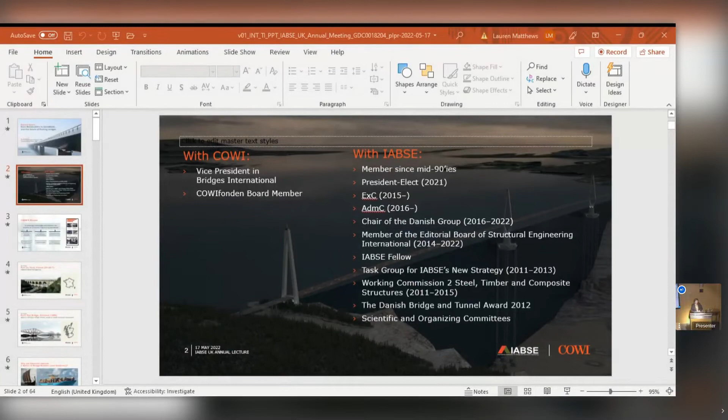Until last week, I was also chair of the Danish group. I have stepped down now because with my new position as incoming president, there is a slight conflict of interest, and definitely with Ian overseeing the activities in the national groups, I don't dare to be the chair anymore. So that was a bit about my activities with the IABSE, and as Ian said in his introduction, it is really very interesting and very valuable.

What I like about it is that it embraces all aspects of structural engineering, all types of structures and materials, and all phases of the life of a structure, from initial ideas until rehabilitation and eventually demolition. It deals with historical structures as well. So there's really something for everybody and for every taste. We're close to 3,000 members in over 100 countries, and we'll soon be celebrating our 100 years anniversary. So I think there's a lot to celebrate in the association.

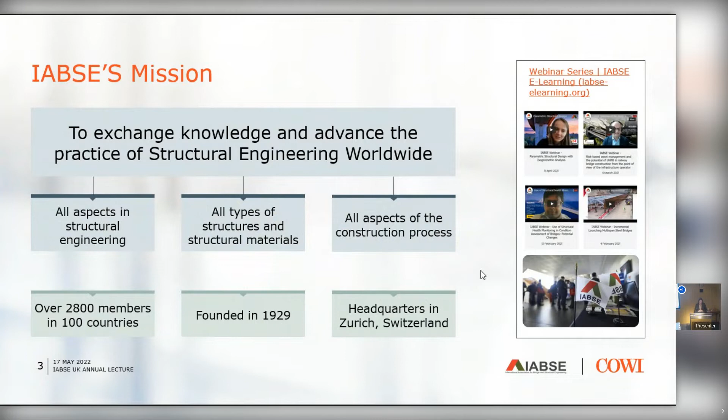So why are structures so important? And as Ian quite rightly said, tonight we're probably mainly focusing on the B, on the bridges, but the S and E, structural engineering, is equally important in the association. So it just happened to be bridges tonight. And I have picked a few examples of historical bridges or structures that I think illustrate why structures have this potential to become so iconic.

And Pont du Gard is, for me, a good example. It was built more than 2,000 years ago as an aqueduct, and it served as an aqueduct transporting water for 500 years. And then it fell into disrepair, and it wasn't really used until 270 years ago, when it was upgraded with a road. As you can see behind the lower level of arches, there is actually a road now passing across the river. So I think that's a good illustration of how old structures can be put into new use and become a very meaningful part of current infrastructure.

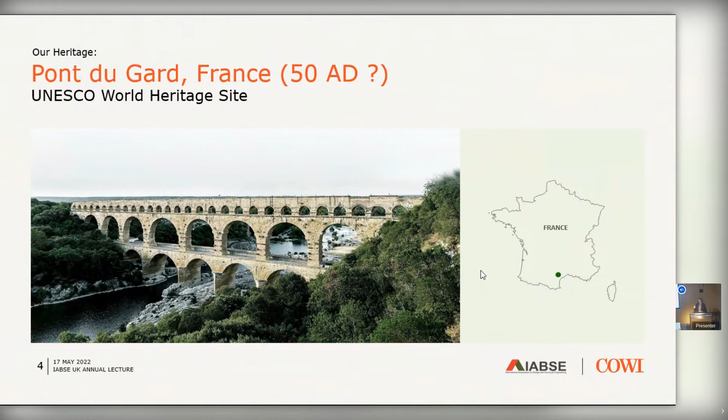Another one I like is the Forth Rail Bridge in Scotland, which, as the name says, is carrying a railway. It's a cantilever truss, and it was the longest span. It was the world record for over 25 years. I think that is amazing. I mean, today the world records are suspension bridges, but back then it was actually a structure like this that was able to hold the world record for such a long period of time.

It is a massive structure, but I think it's beautiful in its own way, because the form illustrates the function, and you can also read how it was built out of this structure. So I think it is a wonderful example of a structure where somebody put a lot of effort and all their skills into it, and it's still in operation, over 130 years. So I think these are really great examples for inspiration.

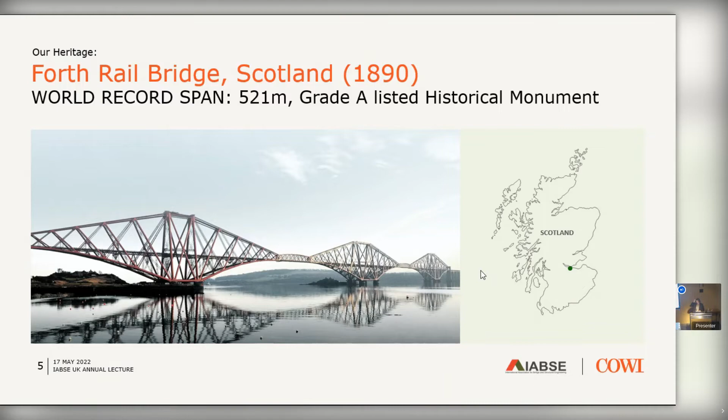So now none of these bridges had any Danish input, or at least very little. So how did Denmark become a nation of bridge builders? And to tell you the truth, I actually think it started with us being seafarers. And I couldn't resist the temptation, being in London tonight, to throw in a picture of a Viking ship, or at least a replica of one. And perhaps I should apologize for the mess that we caused in the process.

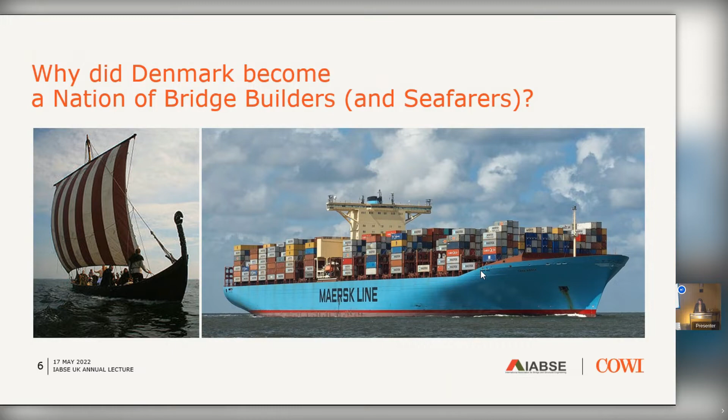We're still sailing the seven seas. This is one of the biggest container ships at the moment. It's owned by Maersk Line, which is a Danish shipping company. So somehow it is linked. And it is, of course, because our country consists of over 440 islands. And there has always been a need to cross the sea or cross obstacles somehow. So I think it's fair to say we started as seafarers, but we became bridge builders.

I would also note that it's a very flat country. The highest natural point in our country is 170 meters above the sea. So we are very concerned with rising sea levels and the effects of climate change. So that is something that feels very real for a country with that topology.

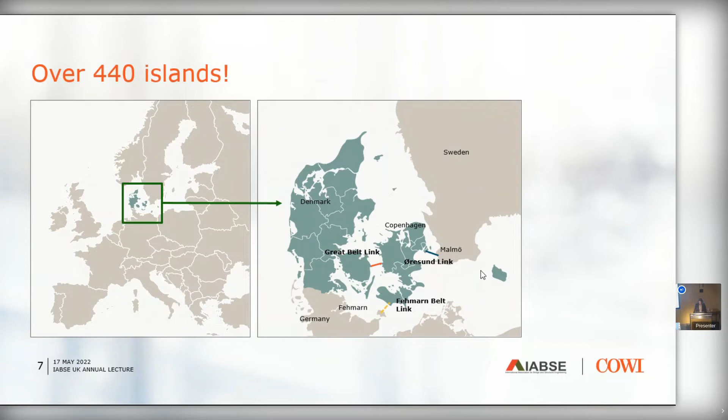We do celebrate our heritage, and here is a selection of the current Danish banknotes. So on one side, it has artifacts from the Stone Age and the Bronze Age and the Iron Age. And on the other side, it has important Danish bridges. And you will see on the biggest bill, we also have the biggest bridge, that is the Great Belt Bridge. So I think it's interesting to see actually that the entire collection of banknotes has a bridge on them. So it just illustrates how important it is for us.

So that takes me to the Great Belt link, and I understand there are actually people in the audience who have worked on it. So if you have some comments, then please add your story. This was the first project I worked on when I joined COWI in the mid-90s. It was just the last phase of Great Belt, and during construction, after the main span had been closed, it was observed that it suffered from vortex shedding, and we had hoped that when the asphalt was put on, it would dampen it, but it didn't. So I was part of the team that had to, in all haste, retrofit it with guide vanes, these little devices underneath the deck that suppress the vortex shedding.

And according to our aerodynamic specialist, it is now as stable as an eye surgeon's hand. So it did work, but it was quite an interesting piece of research we put into it, because there was an expectation that it would suffer from vortex shedding. But again, why fit something that's not needed? It's a waste of material and it needs maintenance. So I think there were some sensible decisions behind waiting.

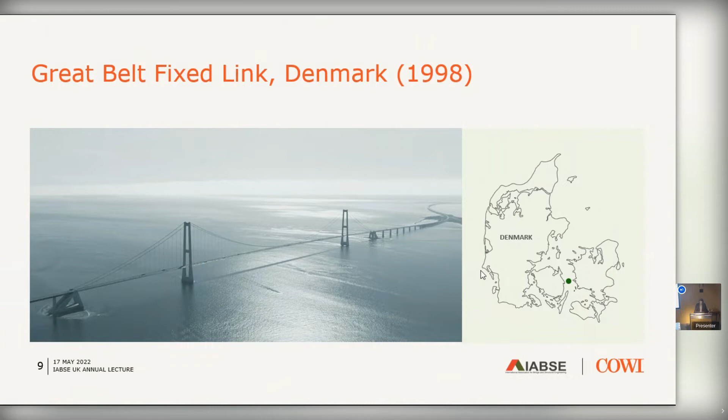Yeah, if you're interested in cycling, then I would encourage you to keep an eye out for this year's Tour de France, because the Grand Départ will be from Copenhagen. And the second stage will pass over the Great Belt Bridge. We'll close it. It's one of the most important pieces of infrastructure in our country, but we will close it for the Tour de France. So on the 2nd of July, the peloton will pass on the bridge. And if we have weather like today, it will just be an amazing day.

Another early career project that made a huge impression on me was the Lions Gate rehabilitation project in Vancouver. I was so fortunate to be seconded to Buckland and Taylor when they joined the COWI group, and they were working on this amazing project. So a complete deck replacement of a suspension bridge, which by then was 60 years old. And it was so carefully planned that they could cut out sections during the night, fit the new section, which has a slightly different cross section, and then it would be open to traffic the following morning. Really, it was just like clockwork.

And I think with our aging infrastructure, we'll see a lot more projects like that. There is a need to upgrade our existing infrastructure and to get the most out of it. Upgrade it to new use, to increased loadings, or whatever is needed. But I think this is a great example of how it can be done.

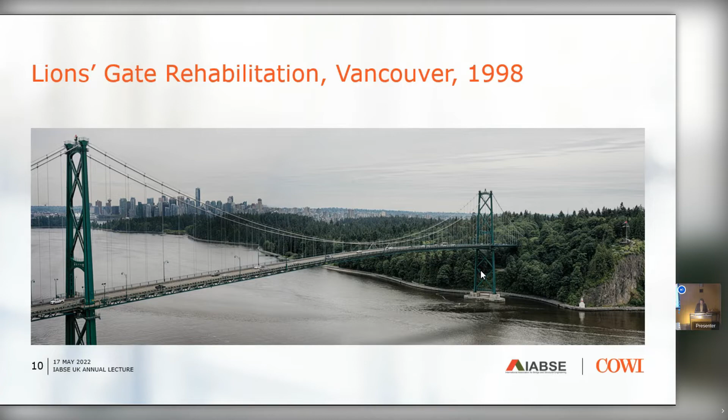And then, as Ian said, let's move to Stonecutters. I think this is a favorite that we have in common. For me personally, if I was to mention only one project, this would be the bridge I would highlight. I worked on the project for 10 years, so it has made a huge impact on my professional career. It started during the design competition, and I'll come back to who won that design competition. You probably have guessed by now. But I was on the other side, part of the team assessing the entries in the design competition. So it was really interesting comparing the different schemes and seeing the imagination that the teams put forward in that design competition. I think there were 25 entries.

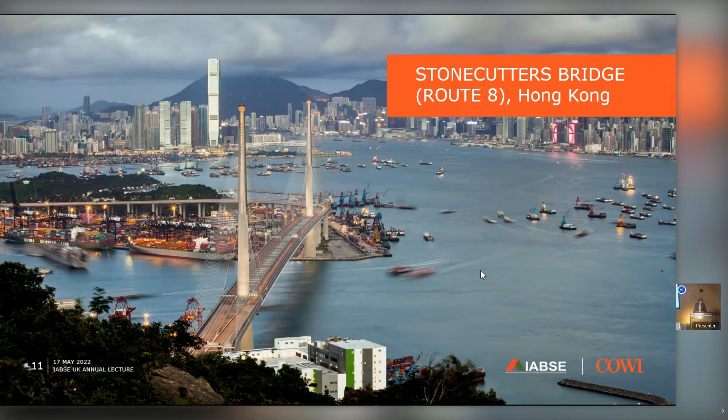And then I moved on to be involved in the detailed design and finished with 3 years on the construction side. And needless to say, the lessons learned and the feedback you get as a young engineer working on a construction site, you just can't pay for it with money. It is so valuable. And I would encourage everybody to have that experience. So the parties involved.

And we should probably start from the bottom, because the winner of the design team was a group with Halcrow, Flint and Neill Partnership, as they were called back then, SMEDI from Shanghai, and then Dissing and Weitling Architects came up with a stunning design. And what is built today is very loyal to that design.

I would also say here's a small link back to the Danish seafarers, because I got this picture from a captain from the Maersk shipping company the first time he passed under the bridge after it opened to traffic. So that was quite nice to see what it looks like from that angle.

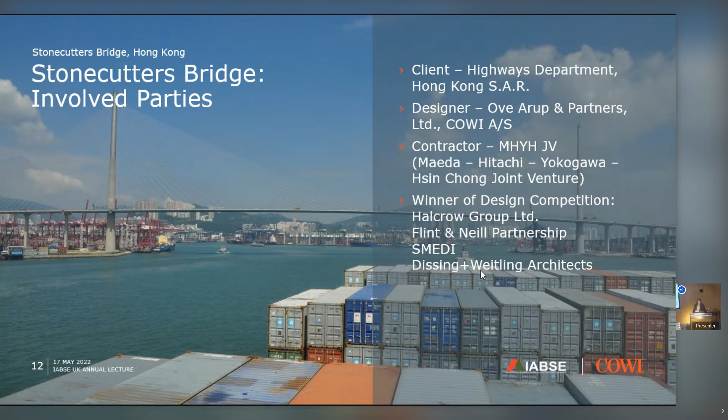What is special about Stonecutters? I think one thing to highlight is the prominent location. You can see it's right at downtown Hong Kong, so it's clearly visible from many areas on Hong Kong Island and the Victoria Harbour area. It's prone to typhoons. Basically, it will get a direct hit, and it has been tested full scale by direct hits of typhoons. There's nothing to give just a little bit of slack on the wind loads.

It is spanning across the entrance to one of the busiest container ports in the world. So closing it during construction or during lifting of deck segments was not really an option. So that was also part of, I think, the decisions that the design team made, or the ones who came up with the concept that a cable stayed bridge would be a really good solution for this location. And in order to span the entire entrance to the container port, it required what was at that time a record span.

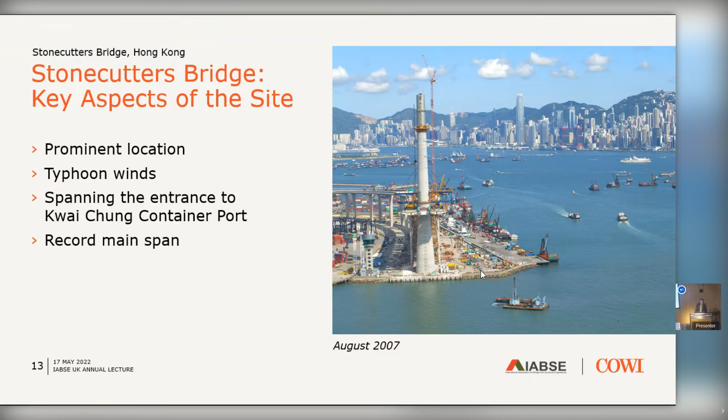So Hong Kong is prone to typhoons, as we heard a couple of times. What you see here is a track of Typhoon York. And the containers that have fallen down there, it's not even the result of Typhoon York. That was just a small typhoon that happened while I was there. And driving home one day, we saw, oops, there was some effects of that typhoon.

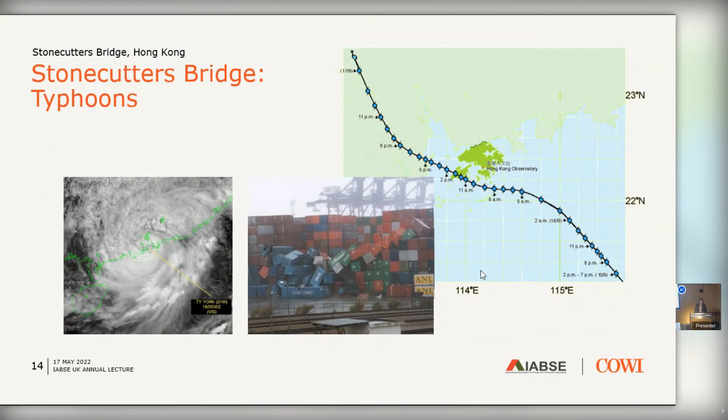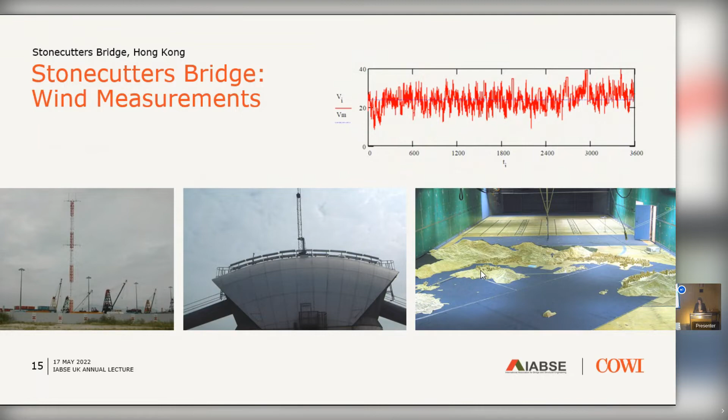And one of the key aspects that came out of it was a combination of the characteristics of the wind, because it was very turbulent at that place. There are some quite high hills, definitely higher than what we have in Denmark, 500-meter high hills nearby. And it was extremely turbulent, and the vertical component of the turbulence played a decisive factor actually in the wind loadings on the deck. And that was of course a combination of the layout of the deck and the characteristics of the wind. And we're kind of taking that learning with us in other designs of twin decks, as we'll see a little later.

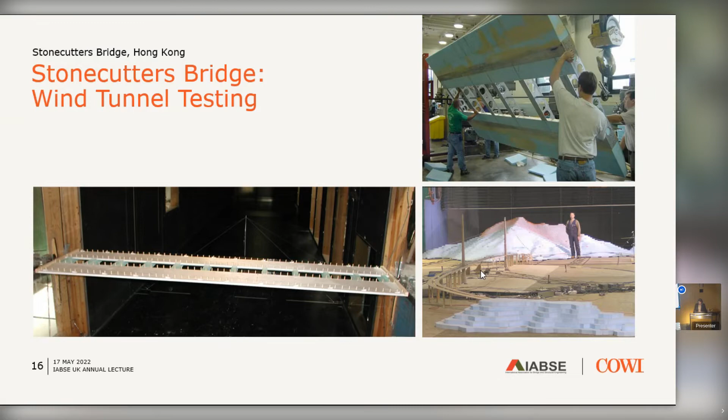So then I came back from Stonecutters in 2008, and it was a little bit of a difficult transition working on a site and then getting back into the office. I have to say it is so enjoyable to be able to go out there and look at the things and discuss with the contractor and find solutions together.

But I moved back in 2008, and then I mainly focused on project management. I haven't listed the projects here, but I worked with a couple of you in the audience on some of them. Tender designs, detail designs, checks, and the first concepts for floating bridges started at that point in time. And then I moved into line management as well.

During the same period of time, I became very active with IABSE, mainly in the first instance thanks to COWI's CEO at that point in time, Klaus Ostenfeld, himself being a former president of IABSE and being very focused on technical excellence. I think that's very much the DNA that runs through the company, and through Flint and Neill Partnership who joined us, and Buckland and Taylor who joined us. It's very much driven by that wish to push the innovations and the boundaries of technology.

So Klaus introduced me to IABSE, and quite quickly in 2011, this group of people were entrusted with the responsibility of coming up with a new strategy for IABSE, which was at that point in time losing membership. As you can see there, with Klaus being at the back, being a former president, at that time the current president was Pete Popovich standing in the front. And then there are four coming presidents in the picture.

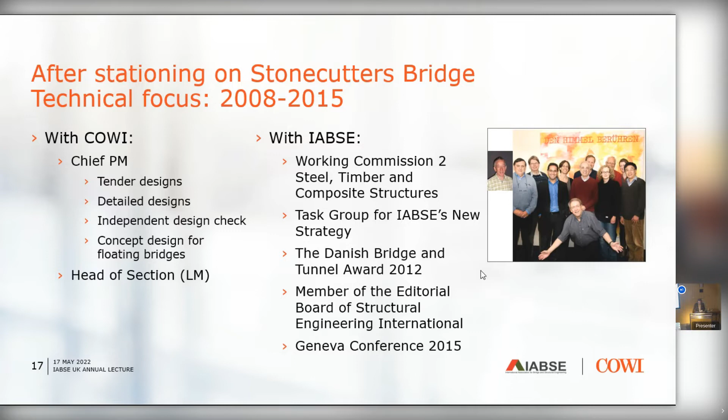Then the next steps for me, I became vice president with COWI in 2015 and a member of the foundation. COWI is owned by a foundation and by the employees. The foundation supports research. We have quite large donations every year to various types of research, not only within the company, it's also completely independent from the company. So that is a very good way to supplement what I do in my daily work.

And then with IABSE, I've been with the executive committee since 2016, and then president-elect from October last year. I look forward to collaborating with Yaojun Ge on this transition period and making sure that all the good initiatives that have been started are also implemented and carried through. So it's a great honor.

How are we looking for time, Ian? Are we okay?

Good, then let's move on to some of these record spans, because during this period of time, we could see a global trend that the crossings that were put forward and proposed were becoming more and more challenging. Deeper waters to cross, longer crossings, and if they're deep and long, they typically require longer spans. In very harsh environments, and consider, as I said before, the effects of climate change are also impacting our structures. The extreme weather is becoming more and more extreme.

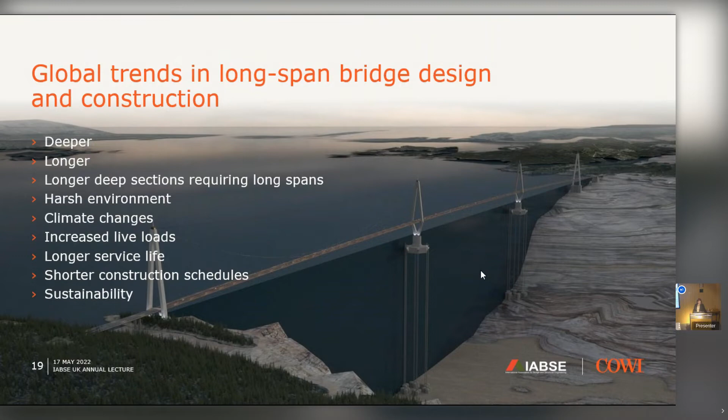So in order to do that, we need to come up with new technology, and we need to apply technology that may already be known in other industries, but we need to bring it into structural engineering. We need to think sustainability, the benefits of digitalization, so we work really efficiently. And we need to design for the future. So it's about imagining what could be the future requirements for this infrastructure. How can we make sure that it is future-proof?

And in order to do that, it's really important that all the stakeholders collaborate. We need to pull in the same direction in order to be successful. And this is teamwork. I mean, this is not something that one single person can claim to do. So even though we all have a favorite bridge, I don't think any of us can say this is my bridge. Those days are over. It's really teamwork.

So let's move on to Çanakkale. So first of all, the location. Perhaps you can see the circle blinking down there. The blue dot in the middle, that's the Sea of Marmara, and up towards the upper right, you have the Bosporus Strait with the 3 Bosporus bridges. One of them, the most recent one, is shown there, Bosporus 3. To the right, to the east, you have the Osman Gazi Bridge, the Izmit Bay crossing.

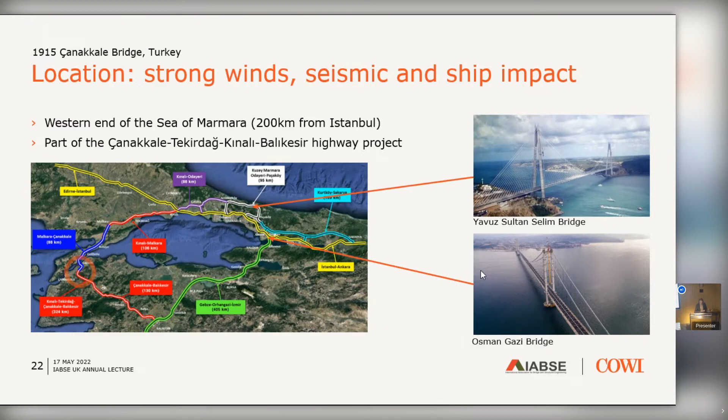So this slide is very busy, but it is really to illustrate to you that it's the red part that is the important thing. The little green bridge there is just a component. So even though it can be very, very meaningful and challenging for bridge engineers like us to design a world record span, it's not a goal in its own right. It is because it's part of something bigger. So in this case, it's part of an 85 kilometer highway that basically closes the loop and saves a lot of traveling time around the Sea of Marmara.

So what is characteristic of this site? When you look at the location of it, on one side you have Europe, on the other side Asia. So there's a fault line in the middle of the strait. The seismic activity is not quite as big as on the Osman Gazi Bridge, but it is quite high seismic loading. And the location near the east end of the Mediterranean Sea means that there are high wind loads.

As you would imagine, there's significant shipping traffic through that strait because it's the only route from the Mediterranean through the Dardanelles, Sea of Marmara, Bosporus, and then to the Black Sea. So there's a lot of shipping traffic, both container ships and cruise ships.

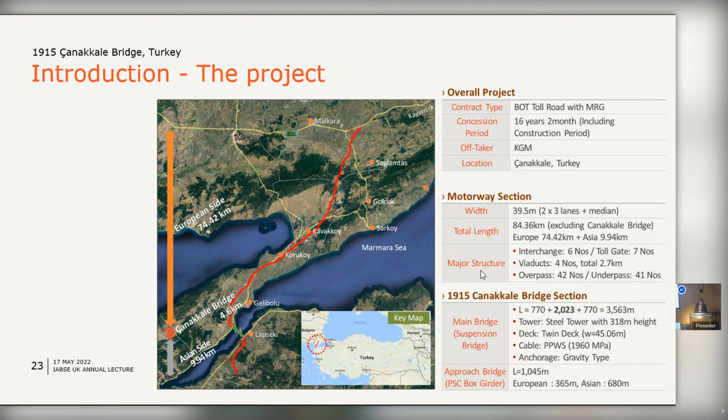There's a lot of symbolism in the design of Çanakkale, and that was there when COWI got involved in the detailed design. So there were some very strict requirements to the design. It is a historical site for the Turkish people, and it reflects on an important battle in World War I in 1915. And it took place on the 18th of March, therefore the pylons are 318 meters tall. The groundbreaking ceremony was on the 18th of March, and the opening to traffic was on the 18th of March. So the symbolism is important.

And then the famous main span, 2023, that's quite an odd number, but it is because the Turkish Republic celebrates its 100 years anniversary in 2023. And originally it was intended that the bridge wouldn't open until next year, but construction was so fast and it was accelerated, so it actually opened a month ago. So in case you wonder what is in it, then that's the explanation.

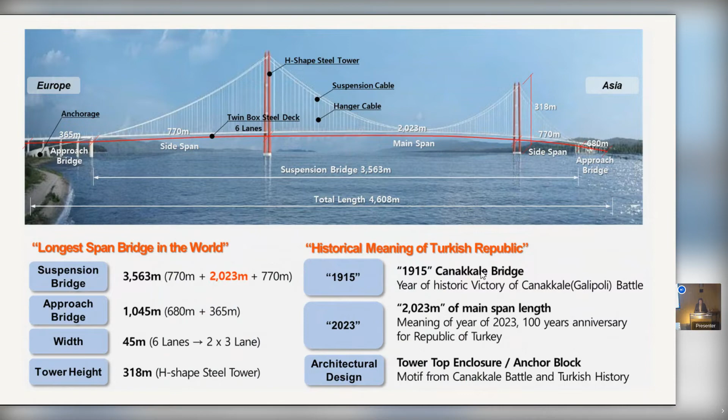Here are the stakeholders, and it is a very international project. The owner is the Turkish Ministry of Transport. And then there is a concessionaire and the contractor, consisting of 2 Turkish contractors and 2 Korean contractors: Daelim, Limak, SK, and Yapi Merkezi. So that was

the contractor joint venture. And then COWI was responsible for detailed design together with Korean subconsultant PEC. And they had developed the tender design, so we didn't get involved until it was actually won. Arup, together with Aas Jacobsen from Norway, were responsible for the independent design checking. And then just to illustrate how complex it is, financing comes from 24 different banks from 10 different countries. So it is a very international project indeed.

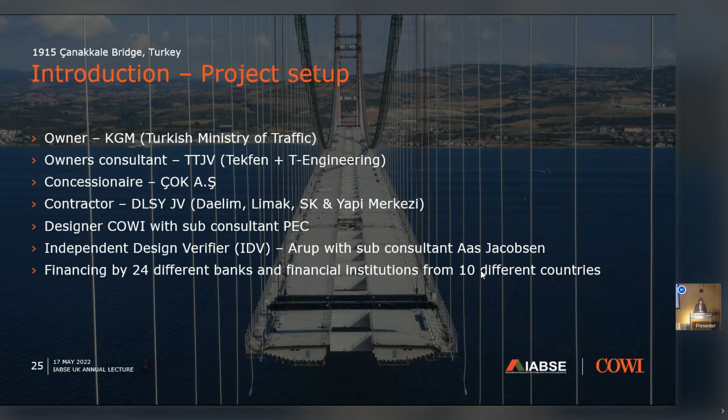The technical challenges include the ground conditions, not super favorable for such a big bridge, and we had to make some modifications. The seismic activity, as I already mentioned, live loads. If you have such a long loaded length, then the live load becomes very significant. Wind climate dominated large portions of the design of the superstructure. And of course, such a big bridge, just absorbing the movement was a challenge. So there were several hydraulic devices installed on the bridge in order to control the movements. And then both the design schedule and the construction schedule were very aggressive.

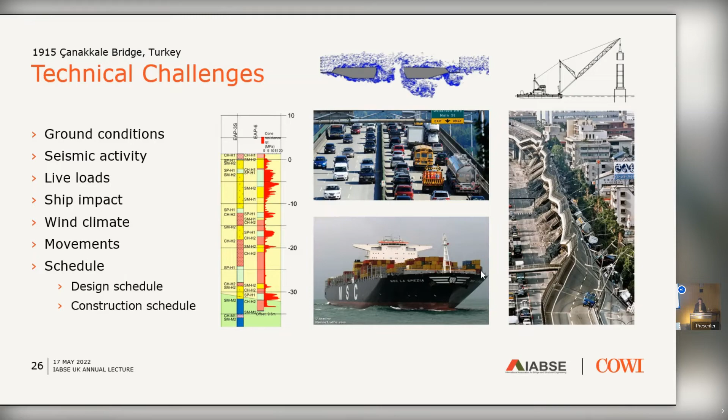So in order to meet such an optimistic design schedule, I'll show you what it is in a second, we had to really optimize digital solutions and work efficiently with the data and not transfer data manually from one tool to another tool. So in the company, we have our integrated bridge design and analysis system where basically everything takes place inside one big global model. It has everything, including the construction sequences.

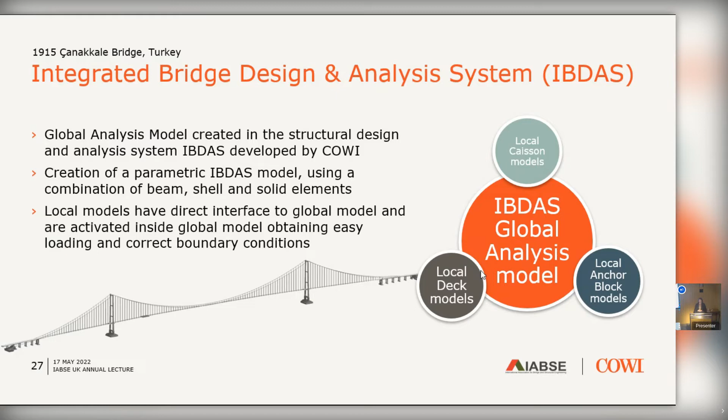So the way we manage it, instead of having a big heavy model to work with, we have these building blocks. So we have shell models of the detail that we're currently interested in, and then we can switch them on and off depending on whether we are looking at the substructures or the superstructure. So in that way, we could optimize the analysis. And also, we included the fatigue model in the global model.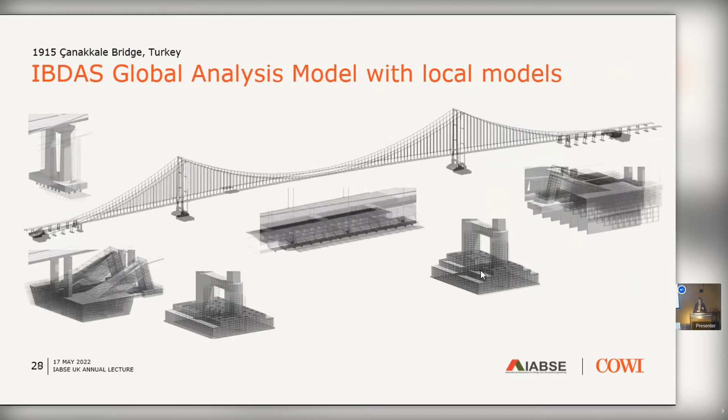And that was actually based on a learning we took away from the Messina Strait Bridge, which I haven't talked a lot about yet, but I'll come back to it. That's actually a triple box arrangement because it carries both rail and road. And during the design of the Messina Bridge, maybe 15 years ago, it was noticed that it was very important to have the global effects included in the fatigue stresses, in the stress ranges. And we wanted to do that because we didn't want to be overly conservative. You can combine worst with worst, but then you're over designing.

And as you all know, the bridge deck is carried by the hangers, the cables, the main cables, and the tower will ultimately take the compression force. So any additional weight in the deck will just have a knock-on effect on all the other structural components. So therefore, a lot of effort was put into really optimizing the bridge deck.

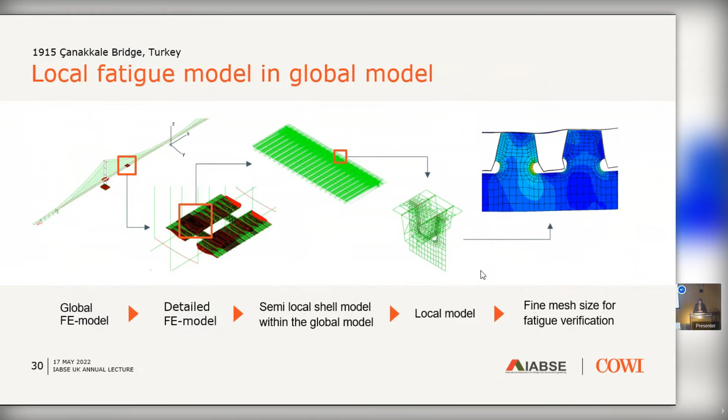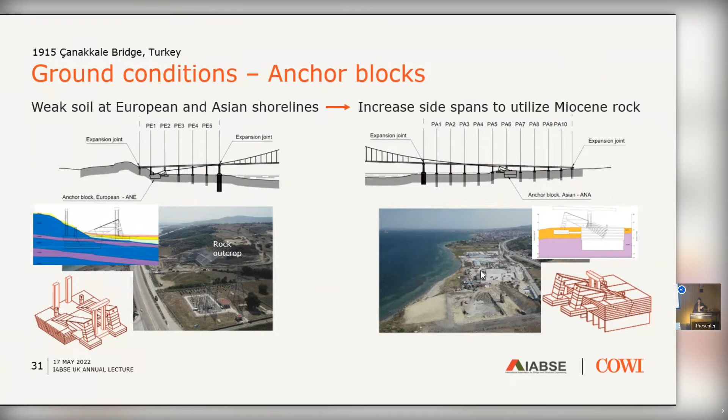One of the first things the team did when they started looking at the tender design was to look at the anchor block location, because the soil was really not good for such huge structures subject to large horizontal loads. So they decided to move the anchor blocks further away. And since we couldn't touch the length of the main span, basically the side spans became longer. And they became so long that it was no longer possible to have a traditional saddle at the side span piers. There was a need for a holding down arrangement. So there was a new feature introduced in order to make it possible to move the anchor blocks further back.

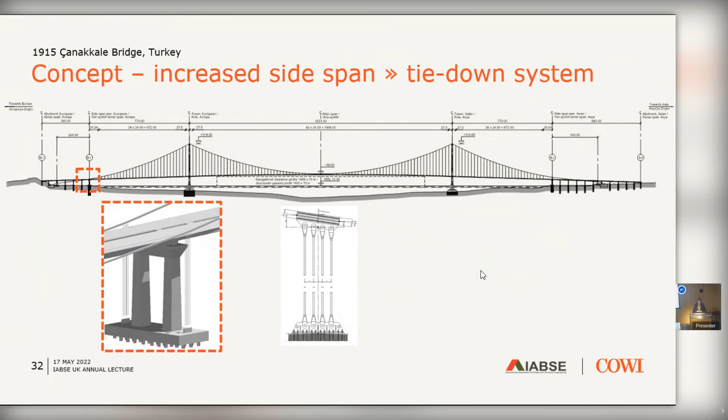Seismic design, nothing really special there. It's done the way you would expect it to be done, with a number of various time histories. And of course, it was made a little bit complicated by having these non-linear elements, the hydraulic buffers at the towers, the soil structure interaction and the wind bearings. But it was all fairly automated and made in a way that it was quite efficient.

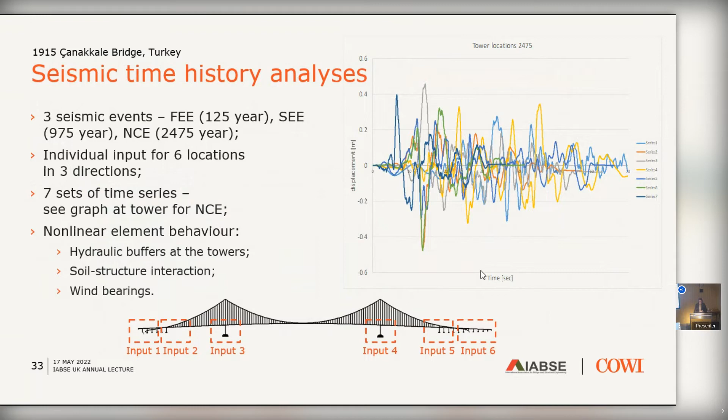In the beginning, when setting up the design basis, we put a lot of effort into reviewing the live loads, because basically our codes are not really set up for such a long loaded length. So we looked into calibrating and seeing whether there could be a little bit of saving on the live loads, and that was possible. It was not a lot, but still worth taking into account because of that knock-on effect on all the other structural elements. And of course, all of that was in close dialogue with the independent design checker and with the owner.

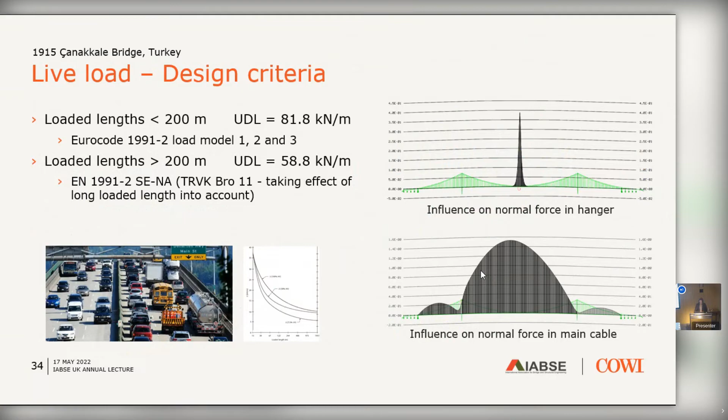Ship collision was a major issue. As you can see there, the green lines, that's a plot of the AIS data from actual ships sailing there in the Strait of the Dardanelles. And the red dots, hopefully you can see the small red dots, that's the location of the pylon. So they are kind of at the risk of being hit by large ships.

And also for a structure of this type, it is important to project or to forecast what would be the future shipping traffic in order to make sure, since this is a probabilistic analysis, that it's still safe towards the end of its service life.

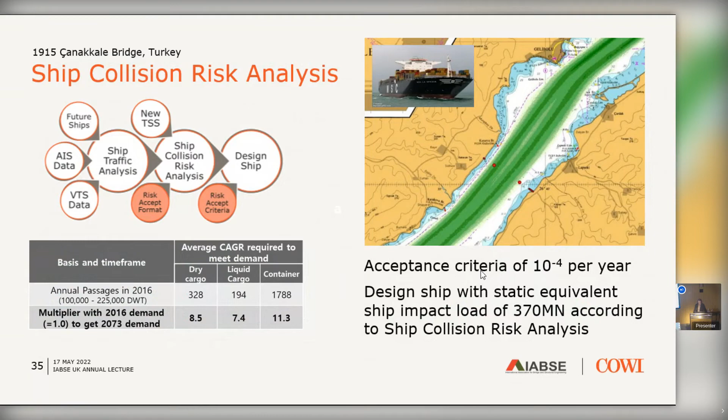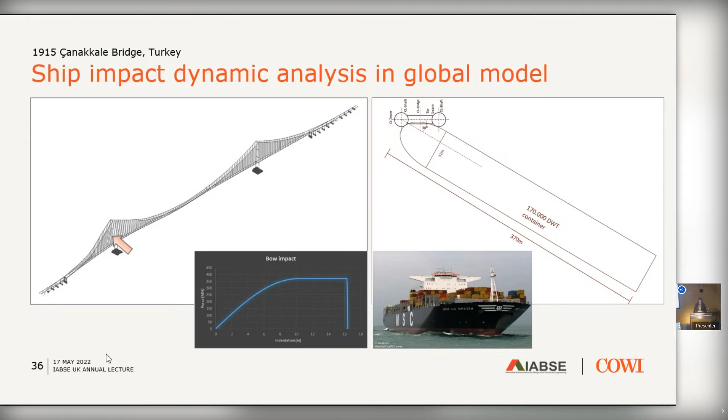So the lower part of the pylons are reinforced so that they can take the ship impact. So the lower 30 meters of the towers and of course the pylon foundations are designed for the ship impact, and that is the governing load. So you can see here for the tower foundations, there are some tie-back arrangements to make sure that we can transfer the forces.

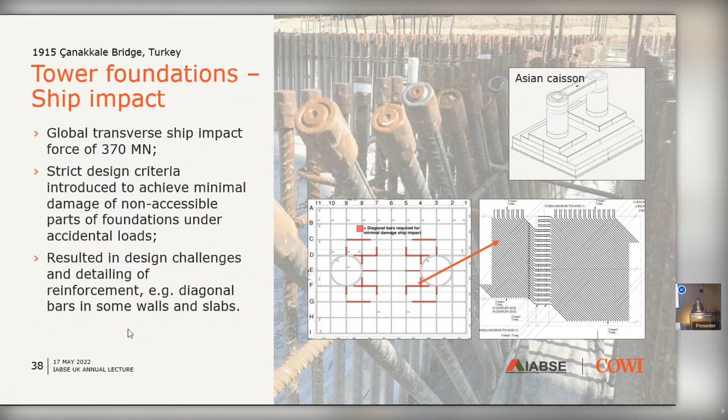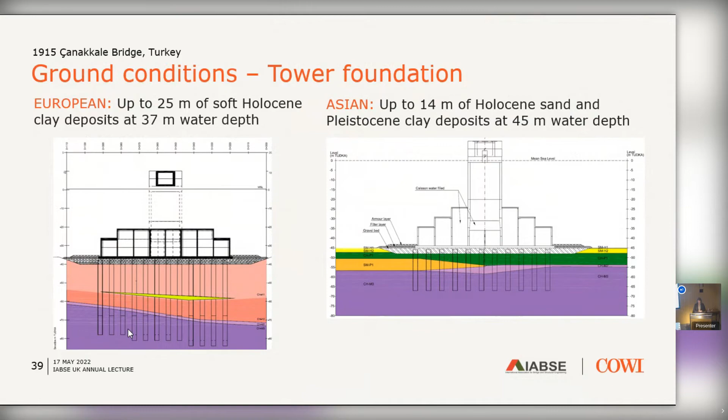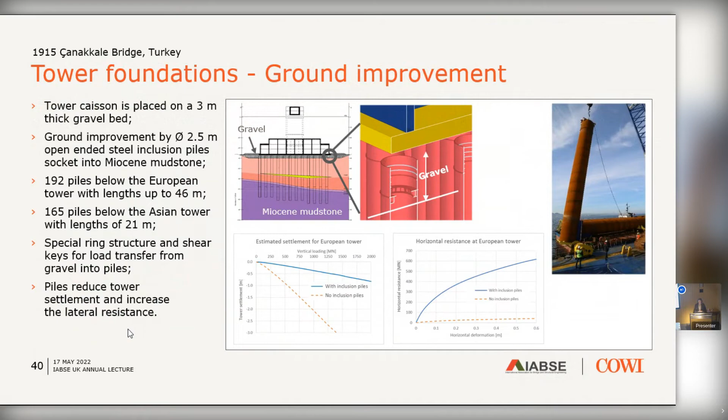Then moving on to aerodynamics, this is very much based on the learnings from Stonecutters. So knowing where to be careful, where to put extra attention and focus on the investigations was really useful in these studies. On Stonecutters, as you recall, it's a twin deck, a split deck with a monotower pylon. So it makes a lot of sense. Basically, the gap in your deck corresponds to the required diameter of the tower.

Here it's a little bit different because it's an H-shaped pylon. So any unnecessary increase in the deck has a significant knock-on effect on the pylon quantities and the cross girders in the pylon. So there was a lot of effort put into optimizing that air gap and keeping it as small as possible, while at the same time, of course, fulfilling the requirements to the critical wind speed.

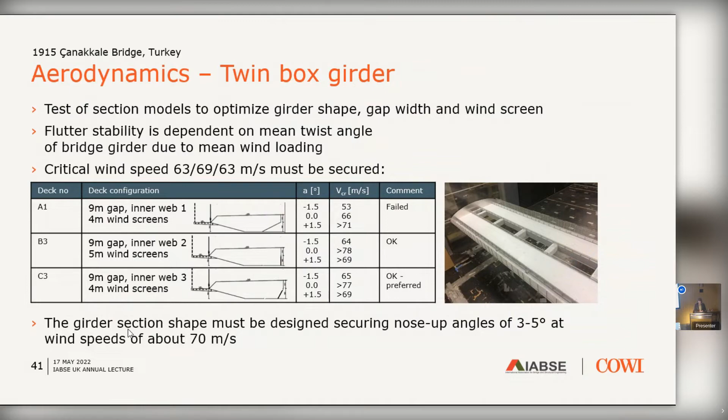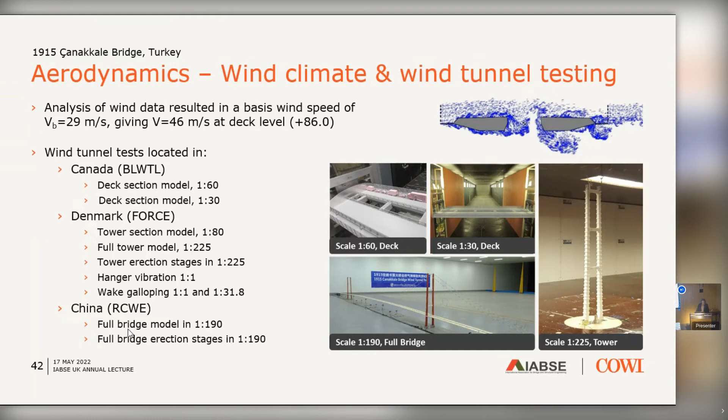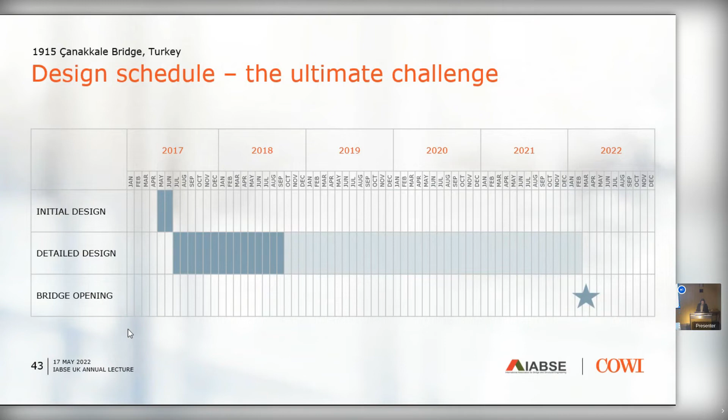And it was basically just head on doing the detailed design. And of course, lots of activities had to take place in parallel in order to make that possible. In all fairness, I would say the contractor was equally aggressive with his own construction schedule. So starting in April 2017 and opening to traffic on the 18th of March this year. So a very accelerated time schedule.

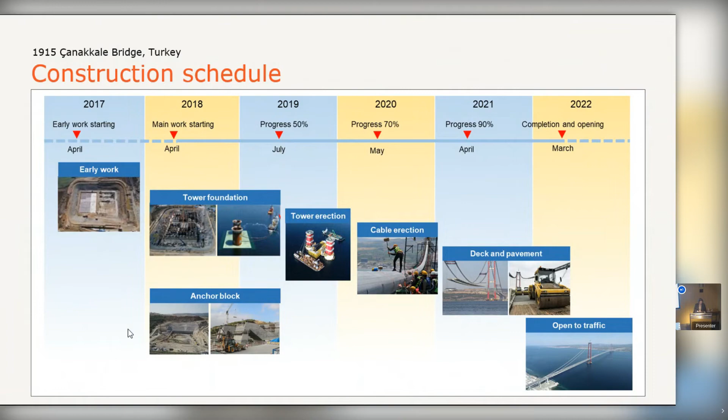And in order to do that, a lot had to be prefabricated to avoid time-consuming fitting on-site and weather-dependent operations. So similar to the Osman-Gazi Bridge, the towers on Canakkale are in steel. Of course, it helps for the seismic as well to keep it as light as possible and as ductile as possible. But it is also to speed up the construction.

So it was a mix of bolted and welded details. The stiffeners on the inside are bolted and the skin plates are welded. And we made some careful analysis to help the contractor accelerate so that they could continue installing blocks before they had completed the welding. Since the towers are obviously on the critical path, that helped a lot on achieving the construction schedule.

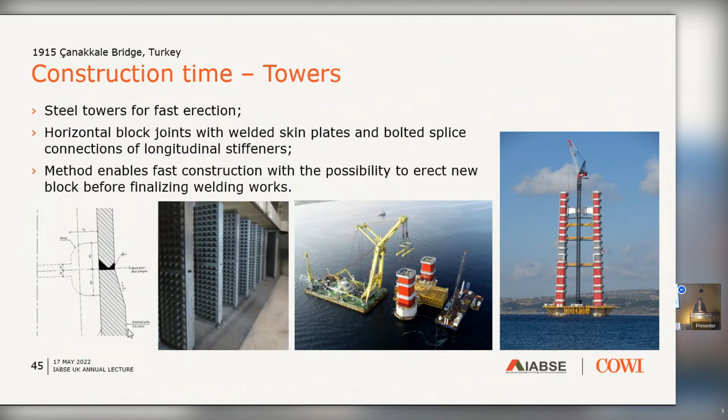And then another thing, and that was a bit of a leap of faith for us, we decided to go into BIM for Canakkale for the first time for such a big project. It was not a requirement from the owner. It was not a requirement from our client, the contractor JV. It was something we decided to do because we felt it was the right way to all the time control the quality, control the geometry, and make sure that we captured all the changes as they happened.

So it was, you can't call it BIM. It was 3D modeling, but it was really the first experience that we made. And gradually it gave us the appetite to also integrate it with our in-house Finite Element program. So today they're actually much more integrated and they speak to each other. And it's just so much easier because we control the code of the Finite Element program in-house ourselves.

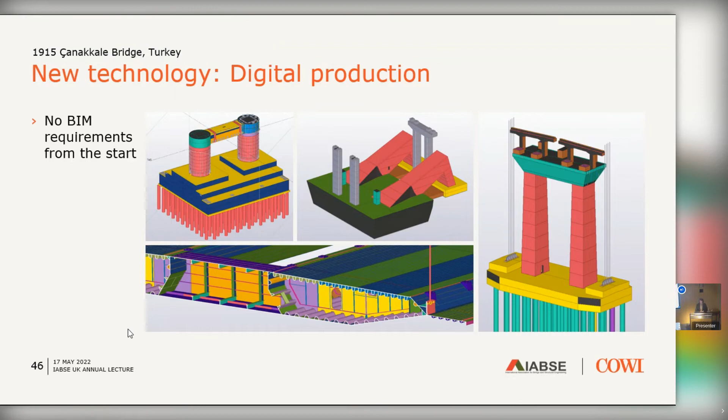The only thing we didn't draw in 3D was the towers, and it was simply because of lack of resources. And we regretted it ever after. We would have wished we had the towers in the 3D model as well. But it came very handy at a point in time where there was a request from the contractor side to accelerate on site. I'm not saying they were delayed, they could just see that they needed to speed up construction.

And a particularly critical detail was the plinth. So the connection between the tower, the pylon caissons, and then there's a plinth and a tie beam, and then the steel shafts can start being constructed. As you can imagine, that's a very tricky detail because you have the concrete meeting the steel, there's the permanent works, there's the temporary works. And it was to a large degree based on in situ processes, and they wanted to go prefab. So we had within 2 months to change the entire construction method for that very, very busy detail.

And we couldn't have done that if we hadn't had our BIM models already available. And they became very useful in the communication with the construction team on tolerances, on sequences, and on what temporary works needed to be there and when they needed to be cut out. So I would say for us, it was a fantastic learning journey, and we haven't regretted a single moment, even though there were some frustrations on the team.

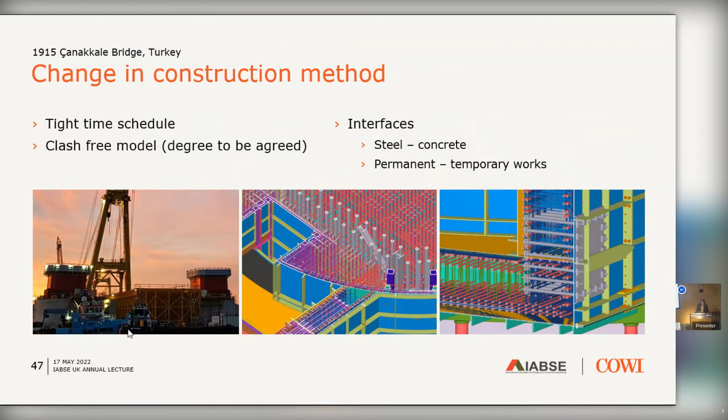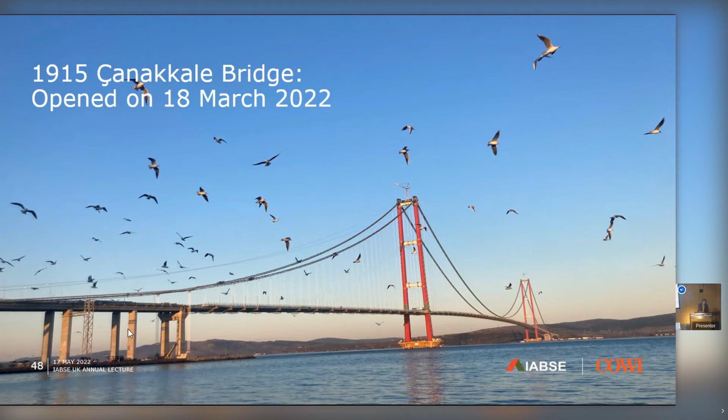Good. Then let's move north to Norway. Are we still okay, Ian? Yeah, we're good. Good. Don't want the bus to be leaving for the boat without us.

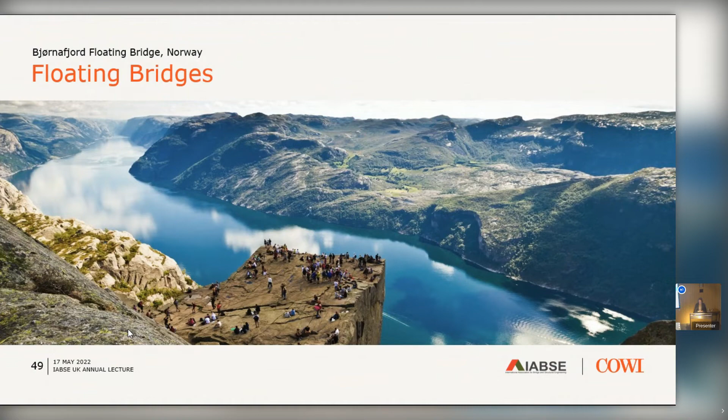Floating bridges. This is a picture from a famous place in Norway, one of their very scenic fjords. And as you can see, if you just continue the slope of the mountain, you can kind of imagine how deep it is. And it is very deep. This is Bjørnafjord, just south of Bergen, the second largest city in Norway. It's a stretch of almost 5 kilometers, and for 4 kilometers, it's over 500 meters deep. And this is the easy one. They have several crossings. This is the easier one, so that's the one we started with. Some of the fjords are up to 1.2 kilometers deep.

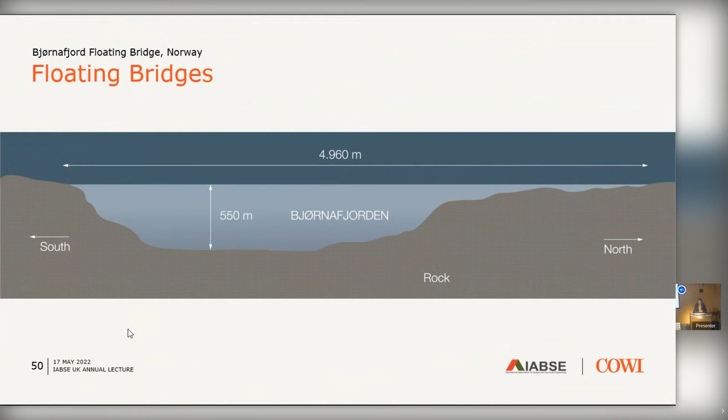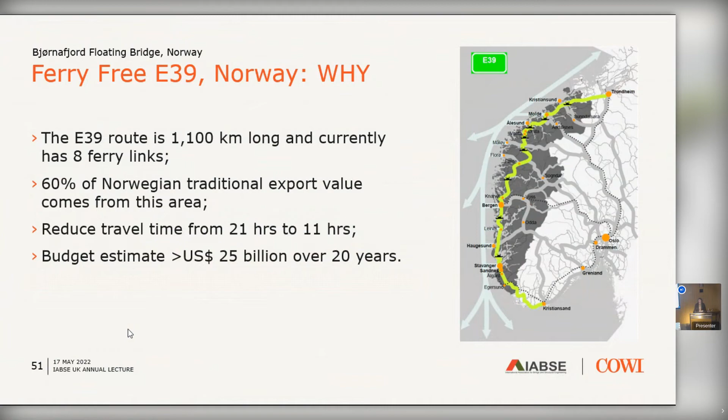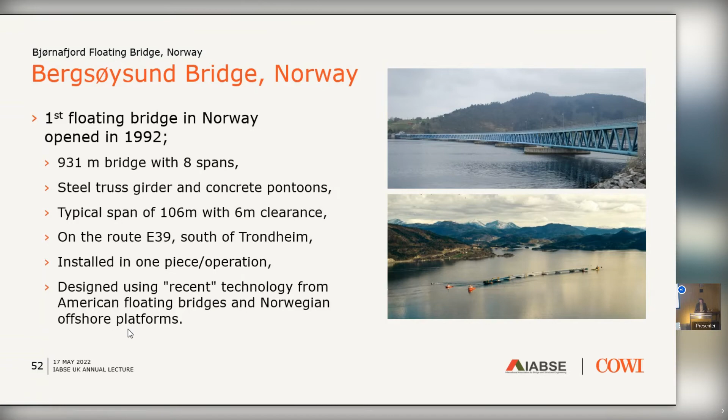So that was the basis for looking at various ways of crossing the Bjørnafjord, this 5 kilometer crossing. And there were 3 different concepts studied. The first one was a curved cable stay bridge where the cable stay span is placed on land. The other one is a 3-span suspension bridge, which is adopting tension leg platform technology from the offshore oil industry. And the third one is quite a fancy one. It's a submerged floating tube bridge. Some people call it a tunnel. We prefer to call it a bridge.

And the challenge here for the 2 above the water is that there's a requirement for a 45-meter vertical clearance for navigation over a length of 400, 500 meters. And that's, of course, different to the existing floating bridges that are maybe placed 6 meters above the surface of the water. This one is 45 meters up in the air, so the center of gravity is something completely different. So that was a challenge.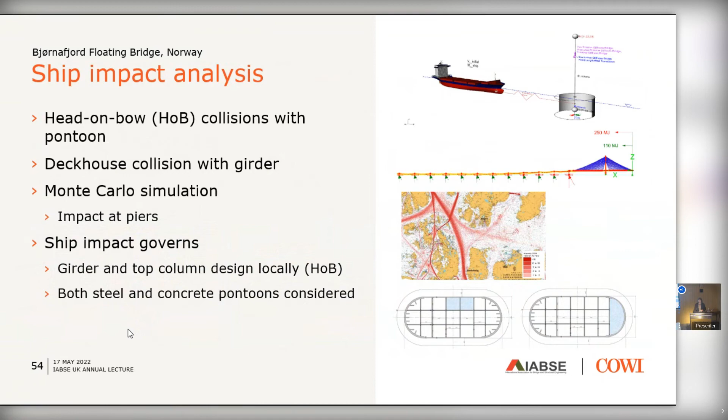And then also the construction, how to get these floating bridges in place, because they may be stable when they're installed, but they're not particularly stable in the temporary stages. So it was inspired by the Bergsøysund installation process, so one big curved piece assembled somewhere where it's relatively still, if you can say that in northern Norway, but it's not too harsh, at least. And then how to ensure the welding quality, trying to connect these pieces that are moving up and down. That was quite interesting.

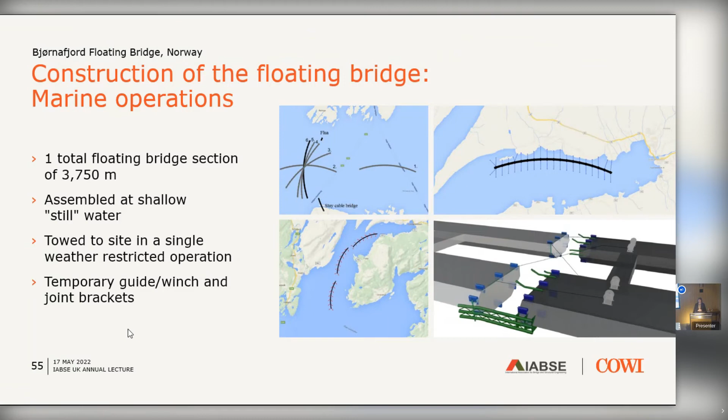The tension leg platform is even more exotic, you could say. It is borrowing from the offshore industry, where they have offshore rigs on similar water depths as we are facing on the Bjørnafjord Bridge. The two central towers are on floating pontoons, so they're steel towers in order to keep them light. And then the two at the ends are on fixed foundations, so we imagine that they could be concrete towers. This one had a top cable to stabilize it. We're still debating with ourselves whether that is a good idea, because it's very difficult to get it installed. But in the permanent condition, in principle, it is a good idea.

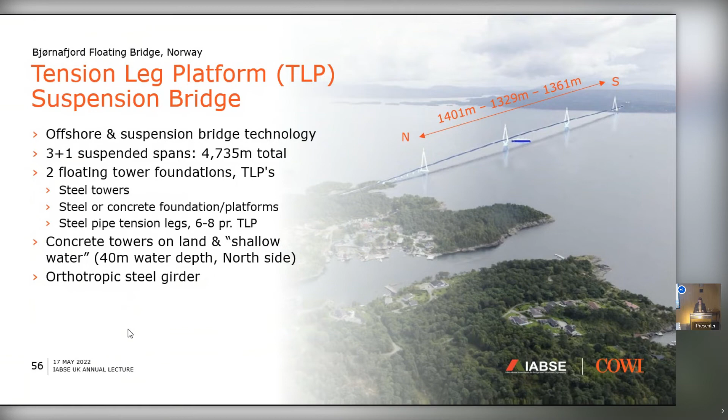And this is what the foundations could look like. So these tethers, they are pre-tensioned steel tubes. So they are tensioned during the installation process. And the anchors can be either suction anchors, as shown here, or gravity anchors. It depends on the soil conditions at that place. Unfortunately, it is susceptible to underwater landslides at this place. So foundations are a big challenge.

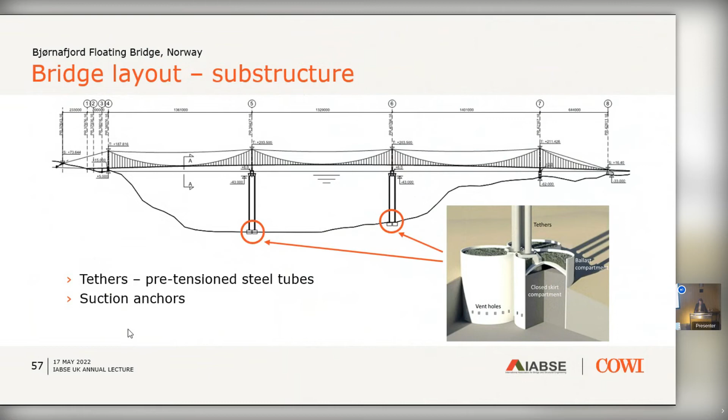And of course, there are lots of uncertainties designing something as novel and innovative as a floating bridge. So the team used this uncertainty log to help them decide the level of maturity of the technology. So basically, they were looking into, is this known technology, and how proven is it? And is it known within infrastructure, or is it known from another industry?

One big difference between the offshore oil industry and infrastructure is that typically the platforms are designed for maybe 25 years or 40 years design life, whereas a bridge would have at least 100 years design life. So in principle, you need to find a way of replacing a lot of these elements, like the tethers. How do you do that? So that was a big part of the job. So thinking ahead, not just how do you get it installed, but also how do you maintain it and replace

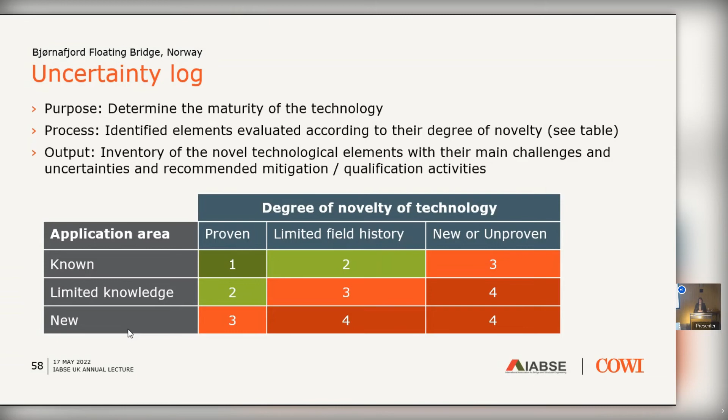critical components. And then, interestingly enough, now we are exporting the technology back into the energy sector, because we're taking it from the fossil fuels into some concepts for infrastructure. Now, in the offshore wind industry, they are looking into wind farms at even deeper waters than what we know today. So in order to benefit from the really good wind climate for energy production at these sites, they would also need to use some sort of floating structures to support the offshore wind turbines. So very interesting collaboration. We have a lot of collaboration right now between the bridge team and the energy team.

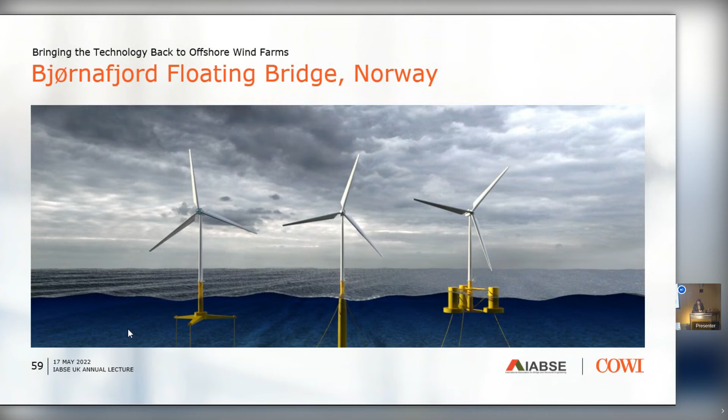So some concluding remarks on these fantastic long spans. I mentioned Messina a couple of times, so this is the first time I actually show it. The Messina Strait Bridge, I think, is a dream project for some, a nightmare for others. Definitely, it was stopped some years ago when the president in Italy was no longer Berlusconi. But it was carried through until a complete detailed design. So we know at least it's possible to design a bridge spanning 3.3 kilometers, carrying both road and railway. And the Strait of Messina is also experiencing large earthquakes.

So even though it hasn't been constructed, and that's of course the ultimate test, constructing the bridge, that's where we get the real learnings. And definitely speaking for myself, that's where my biggest lessons learned were, from the construction process of Stonecutters. But it has been designed, and a lot of the learnings have been implemented in projects later on. So I think it just illustrates the importance of keep pushing the boundaries and keep investigating and keep exploring, because even though it may not be implemented today or tomorrow, we just learn so much from it, and we really improve our technology and our understanding. So that's a takeaway from me.

And I would also say that Messina may not be constructed in the near future, but we are looking at bridges that will beat Canakkale in the not so distant future. In China, they're planning suspension bridges that are even longer. In Nanjing, if we get to go to Nanjing in September, they are in the first phases of construction of the Zhangjinggao Bridge, which will have a main span of 2.3 kilometers. So even though Canakkale was the first one to break the 2-kilometer barrier, it won't have the record for long. And in the south of China, they're designing a double-decker suspension bridge, 8 plus 8 lanes, so 16 lanes in total, spanning 2.18 kilometers. That's perhaps an even bigger challenge, I would say.

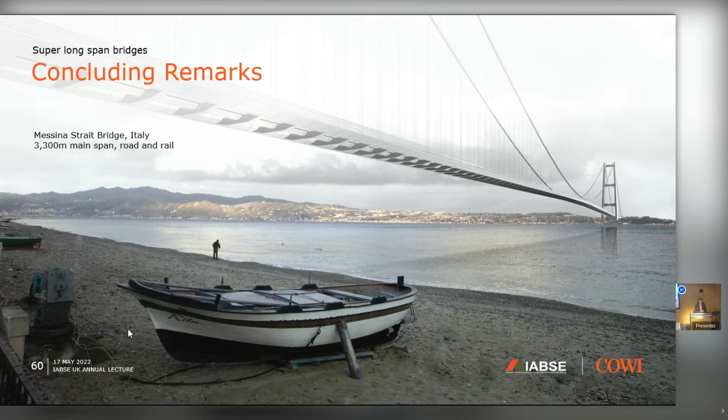But it's not all world records. I think if we have the time, I would like just to spend a few minutes presenting this one to you. Are we okay? Yeah. Good, it's just 2 slides. Because it really closes the circle for me, at least.

So while the floating bridges have been stopped in Norway, while Canakkale has been constructed, and while the world has been in 2 years of lockdown due to COVID, in the Philippines, they have also made a remarkable achievement, I would say. This is the Cebu Cordova Link Expressway. You will see some similarities with Stonecutters. I guess you can guess who's the architect. It's the same architect as on Stonecutters. So some inspiration. It is the longest and the tallest bridge in the Philippines ever. And for them, it was a major milestone having this project completed. It's a toll road approximately 9 kilometers long.

So it has this main bridge, which is a modest 390 meters, but with a 51 meter navigation clearance. And then some quite complicated ramps and then the access viaducts down to a causeway. And as you can see, it's traveling through a really beautiful area with mangroves. And I think it's just amazing to see a country like the Philippines, with all due respect, with the level of skills, and in the middle of a COVID lockdown, that they are still able to complete a project like this in 6 years. It shouldn't be compared to Canakkale, but it's still an achievement.

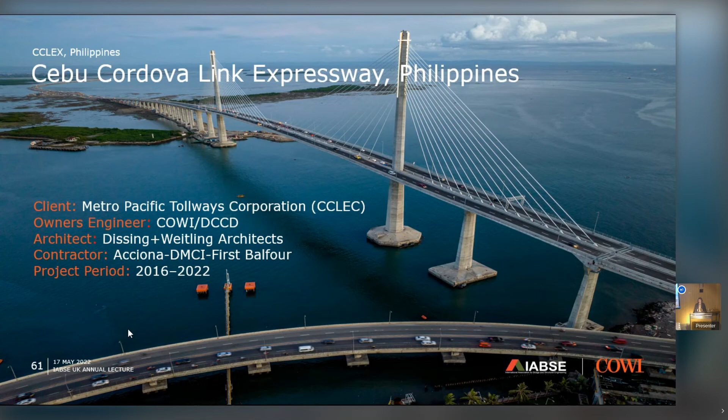And they had 2,000 workers isolated on the construction site for half a year during the lockdown. It was the only way they could do it. So this is what it looks like at nighttime. And that takes me to the final slide.

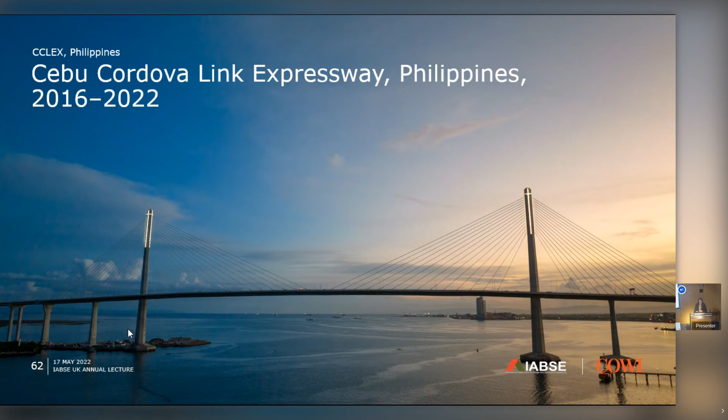And now I was hoping that I could embarrass Ian a little bit. But this is a reference for me.

And we talk a lot about sustainability, and it's not just carbon and quantities, it's also the aesthetics. And now I mentioned architects a couple of times. I know there are also architects in the audience, and I could have mentioned some of our collaborations, but I think it is important that we also consider that our bridges should be beautiful. They're standing there, they're part of the built environment for 100 years, and coming generations will look at them.

So I think it is important that we make an extra effort. It doesn't have to cost additional money or additional materials or anything. It's more about the effort and the good collaborations, I think, and benefiting from people who are actually experts in their field, which is designing beautiful structures. So if you haven't watched this TED Talk, I would encourage you to do so and be inspired.

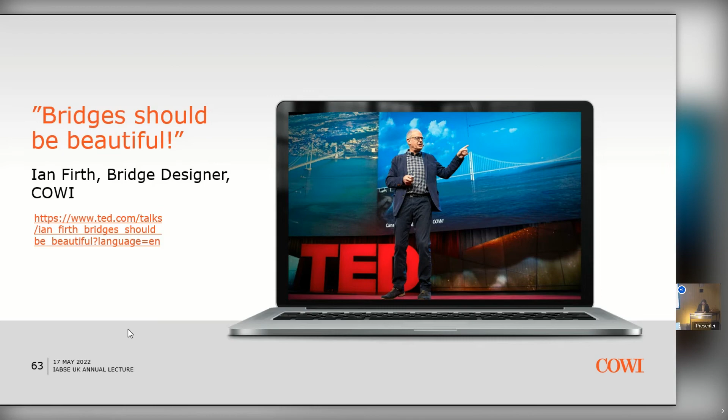So yeah, that was all for me, and I would just again encourage you to stay active in IABSE. It's a wonderful synergy with what you're doing as structural engineers, and do reach out to anybody from the executive committee in the British group, or reach out to myself. We're more than happy to discuss with you how you can contribute, and if you have ideas, please bring them forward. Thank you very much.

Thank you, and no thanks for the embarrassment at the end, but I suppose I get a copy of that slide.

Tina, thank you, that was fabulous. And for those of us who work in the long span world, it's been something really special to see some of those projects. We have time for some discussion before we have to head off to catch a bus to get a boat. So please do put a hand up.

There is a microphone, but I think probably if we can do it without, just shout from where you sit. If I can't hear you clearly, I will come with a microphone in hand. But it just saves you having to run around the room. In fact, yes, come on, David, I shall give David the microphone. He can run around the room. But do, please, who'd like to start? Who'd like to kick off with a question for Tina? Should we put some lights on? I'm going to put the lights up so we can see you as well as you can see us. Who'd like to kick us off? Question or comment from anybody? Right at the back, please. Shout it out. Hi there.

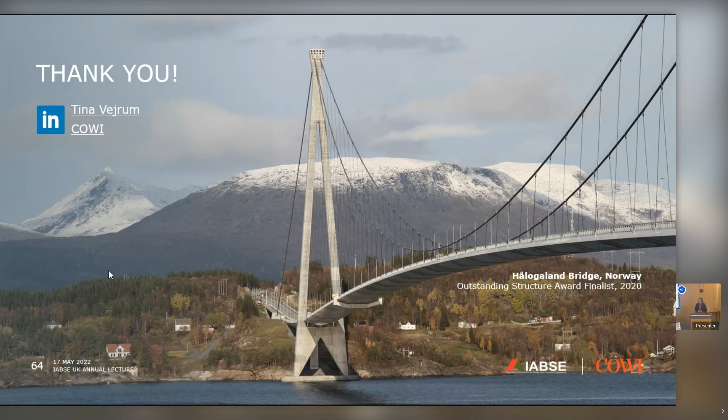So thinking about, in a clever way, where would you put additional capacity so that it enables future generations of doing more with the structure. And it's not putting it everywhere where it's not needed, but the critical details, like the nodes and the connections, where all the concentrated forces come: okay, should we do a little bit extra here? Or should we consider an additional deck on a bridge? Or should we consider that one day perhaps the hard shoulders will actually be used for a traffic lane?

There are lots of things where we, together with our clients and the infrastructure owners, can have that discussion of what is meaningful to do today, what is meaningful to try to plan for, and what is simply too expensive to include now. But it's being mature enough to have that discussion of the initial cost, the cost of operating the structure and the cost of upgrading it. That would be my attempt at that. Ian, I'm sure you can supplement.

Well, I guess part of the answer is to do with those bits that actually can be replaced or upgraded, because there are several elements, for example on the suspension bridge, that are very difficult to change. Main cables, for example, foundations. These things are difficult to change, whereas some elements you can. So there'll be different answers for different parts of the structure. But that's a great question, and it's a constant challenge. It's something which we're all much more aware of now, thankfully.